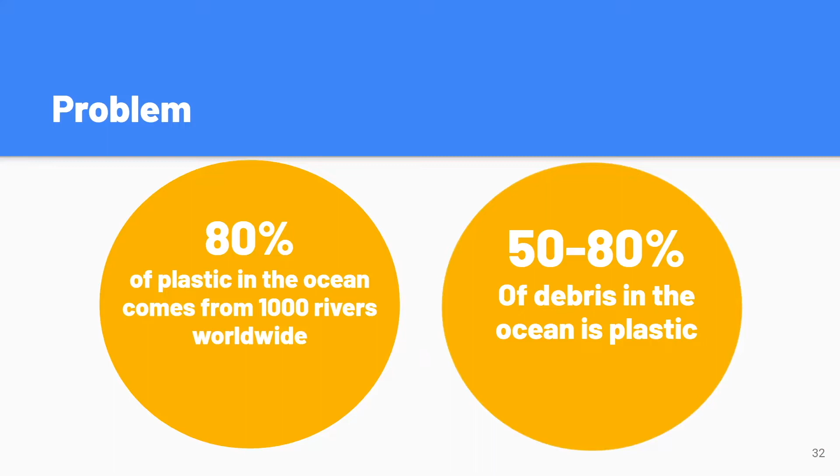On a global scale, 50 to 80% of the debris entering the ocean is some kind of plastic. And 80% of this plastic debris comes from land-based sources and enters through rivers. While there are many efforts to reduce this debris, such as anti-littering campaigns, banning single-use plastics, and beach cleanups, the rate at which plastic enters our oceans is still increasing. Therefore, it is imperative that more direct solutions be implemented to remove and prevent these plastics from reaching the ocean.

This problem has adverse effects on the marine ecosystems it affects, as many species are physically harmed by both the ingestion and entanglement of these plastics. The exposure of larger plastics to the ocean environment causes them to break down into smaller microplastics, which are defined as any plastics smaller than 5 millimeters. These microplastics contain chemical contaminants and can be ingested by many marine organisms.

One study found a concentration of up to 2.1 trash items per fish in a certain area. As these plastics make their way up the food chain, the concentration of plastics increases, and by the time it enters the seafood consumed by humans, it can range from 0.7 to 30 milligrams per 100 grams.

There are current solutions aimed at collecting marine debris, both in rivers and in the ocean. These solutions, however, are often prohibitively expensive and lack the capability of sorting the trash they collect. Without this functionality, much of the debris collected by these sources is either sent straight to the landfill or incinerated. Because the mismanagement of landfills is a large contributor to why this debris enters marine systems in the first place, sending it straight back to landfill does very little to fix this problem in the long term.

Their collected debris cannot be brought into recycling facilities as there are far too many non-recyclable items to sort through. Thus, without the ability to sort items, these solutions are missing a key portion of the problem they look to solve. The goal of our project is to build off of existing models to create a cheaper and more effective solution to the problem of ocean plastics.

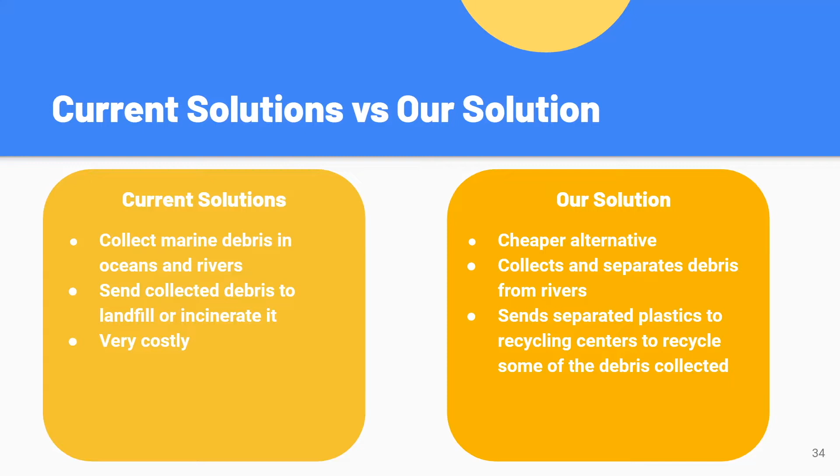By including the novelty of sorting trash into plastics and non-plastics, the debris collected by our collector should be able to be sent to recycling facilities, as the amount of non-recyclables in the plastic bin will be at a much lower concentration and will be more easily separated into recyclables and non-recyclables. Our design consists of a floating body that is stationed at 2 points in a river, with funneling arms that draw the debris into our collection area.

The trash will then be picked up by a conveyor belt, and as it moves along, our algorithms will run to detect plastics on the conveyor belt. When a plastic is detected, as it falls off the conveyor belt, a panel will open, allowing it to fall into the plastics bin. Otherwise, if plastics are not detected, the panel will remain closed and the debris will fall into the non-plastic bin. These bins will be removed by a forklift and brought off-site. The benefit of using 2 separate bodies in the river is that our design will not impede any wildlife or boats from moving down the river.

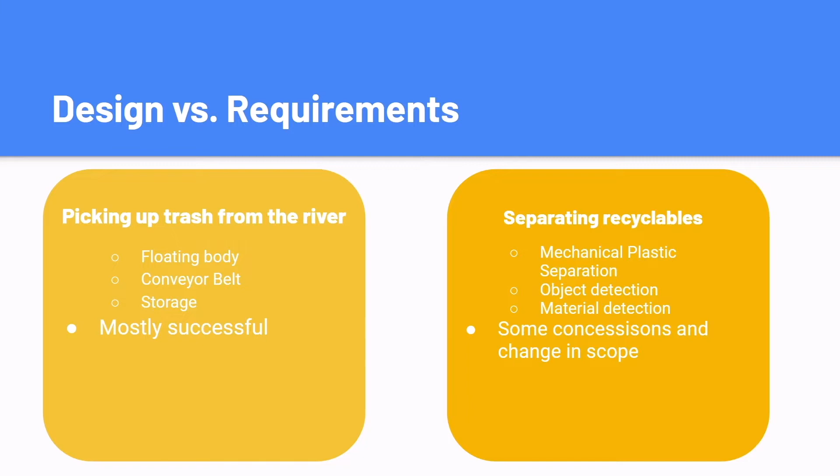Next, we'll compare our design and our initial requirements. Overall, there are essentially 2 large overarching categories of capabilities that our system is supposed to exhibit. The first is picking up trash from the river, and the second is separating recyclables from that trash. For the first category of picking up trash, our system satisfies basically all of the capabilities.

One capability needed for all the other ones is having a floating base to hold everything, as well as a frame to protect the other subsystems. The resulting design for the base and frame are capable of this, as backed by various buoyancy calculations and flow simulations. Another needed capability was funneling the trash. For this, we sourced a design that was used by similar river cleaners, and as such, we're confident it will work for ours.

We also required something to move trash out of the river and into the bins. For that, we found a conveyor belt system to buy and adapted it for our system. Lastly, we needed storage capable of storing trash and being easily removed while also remaining stable on the rocking boat. The resulting storage bins and latching system satisfy both of those.

While the design largely meets all the targets based on the previous examples, we were unable to simulate or actually test the full system at picking up trash. Before proceeding with any actual manufacturing, running a full-scale simulation or even a scale model testing would be imperative to find any possible faults that we missed.

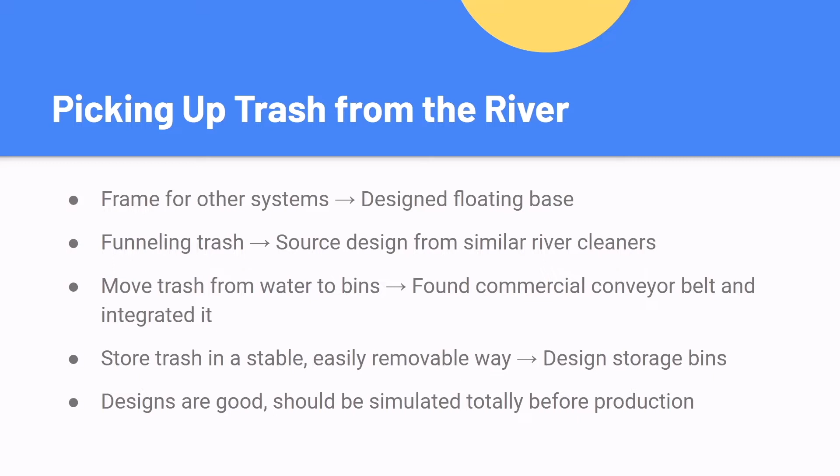The second primary category is separating recyclable plastics from non-plastics. From the start, there were concessions that had to be made here in order to reduce the scope to be feasible. For one, we considered if we needed to implement a drying or jostling station to further separate the trash for processing. However, this would add too much complexity for what was already a very large project. As such, we assumed a sparse trash flow, which wouldn't need this extra station.

Whether or not this drying and jostling step is actually needed is still unknown. Further testing with real trash in a river and analysis of trash density in rivers would be needed to answer this question.

The other mechanical portion of the separation, the panel system, met the capability it was designed for, and this was physically portioning trash into either of two bins. The system had no large difficulties in design, so we're confident it can perform the task, and we will be testing on a prototype to actually confirm it can.

For the algorithmic and sensing side of the plastic separation, there were a couple concessions that had to be made due to the fairly difficult process. Initially, we had a goal of using a SWIR camera to be able to detect if an object was plastic or non-plastic. However, due to the expensive cost of the needed camera, we pivoted to testing with a handheld spectrometer, for which we would aim to write an algorithm.

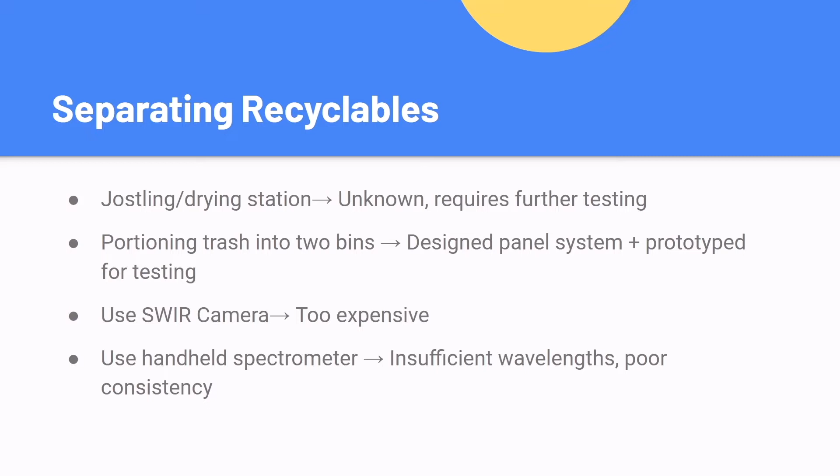Unfortunately, the spectrometer was insufficient for our goal as it was unable to detect the necessary wavelengths, and it was also extremely inconsistent based on the shape of the object. These are issues that we wouldn't have had for the real camera. However, we were still able to use the spectrometer to detect some plastics and other materials in very flat scenarios.

Due to the inadequacies of the available equipment, we decided that the overall detection of plastics was not going to be feasible during our remaining time. As such, the scope was pivoted to instead use a color detection algorithm, which would mimic what the plastic detection algorithm looks like. While we believe this algorithm is similar enough such that it would translate to the SWIR camera, this would still need to be tested on such a camera to confirm it.

Another part of the algorithm, which would be needed for the actual design, is a computer vision system for object detection. The goal would be to form an object mask and track its position. We have developed an algorithm for webcam, which would pretty easily be translated to our design camera. While it is able to track similar objects on the conveyor belt background, it is still insufficient in detecting objects layered on top of each other.

Overall, on the mechanical end, all the designs that we made ended up satisfying their intended capabilities. On the algorithms, again, there were definitely a lot of issues and unknowns which had to be explored early on, and so we didn't have much time at the end to do actual designing. The scope had to be reduced, but the resulting algorithms are similar enough that implementing them on the real design would not be a big leap in logic.

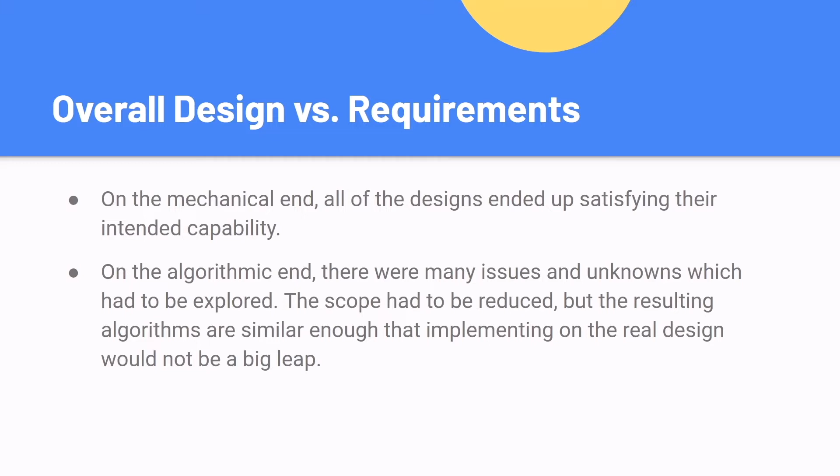Hello everyone, I am Oscar Knox White, and this quarter I worked primarily on the floating body subteam. We began this quarter researching the existing designs and seeing where we thought we could improve. Additionally, we looked into what materials were commonly used when designing aquatic bodies.

Our initial design consisted of a platform that used large plastic barrels to provide the buoyancy to the rest of the body, with a frame to hold the other subsystems and provide support and cover to the body. For this design, we planned on using aluminum 6061 for the frame and platform, and high-density polyethylene for the barrels. These materials are commonly used for long-term aquatic equipment as they have high durability to the environment.

As we did not end up going with the barrels, we did not use HDPE in our final design, but aluminum 6061 is still the primary material for the frame. After making these selections, I began developing the frame of the body. I started with an initial CAD just to get a general idea for the shape.

The design was angled on the sides with a truss along the edges to provide lots of support to the body. In this initial design, the dimensions of the body were far too large to reasonably continue, so I realized I would need to redesign it. It was also decided that the only loads being carried by this outer frame would be from the plastic separation camera, the conveyor belt, and the plastic separation mechanism. Thus, the strength of the frame could be lower than I initially anticipated.

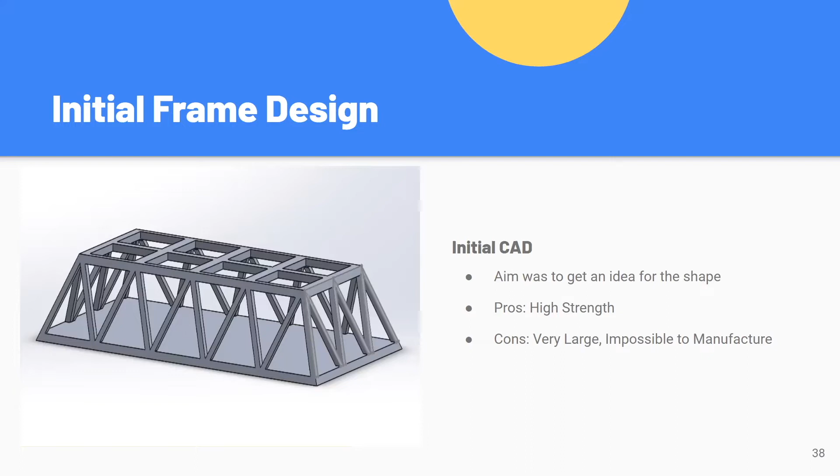I also needed to determine a way that this could feasibly be manufactured, so I decided to use shorter individual beams that would be welded together on site. This next design shown is very close to the final design that we are using now. The only adjustments made to it can be seen in the full assembly, which I will show later on. I then moved on to work on the funneling design and got a bit of progress on that before we decided one of my teammates would be better suited to finish this design.

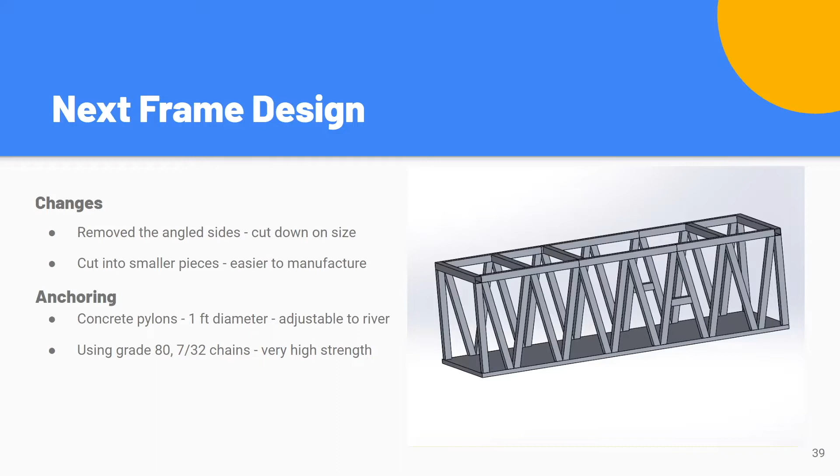From there, I began researching the anchoring of aquatic bodies and decided I would use concrete pylons with chains securing the body to them. These pylons are very similar to boat docks and can be easily installed in rivers using PVC piping. I then determined that the anchoring would be the largest load on the body, so I ran a simulation to verify that the body would be able to withstand it, which is shown here. This study is run with a load that is over 6 times what we expect the average drag force will be in the river, showing that the frame will certainly be able to handle the force of the anchoring.

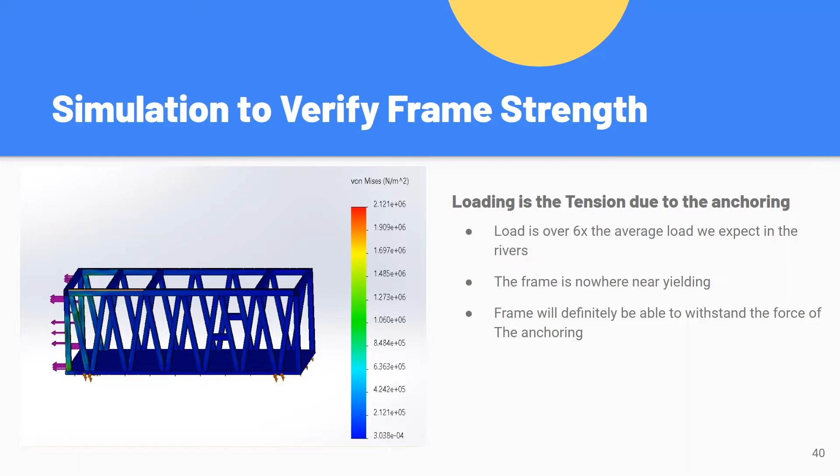Another thing I worked on that didn't end up being used was a small scale version of the floating body that we were going to use to demonstrate the movement of the body in flowing water and to verify that our funneling worked. This was ultimately scrapped because the flow of the water likely cannot be directly scaled down in the way that we expected. Also, the anchoring system we are using is kinematically constrained, and thus the floating body will not move.

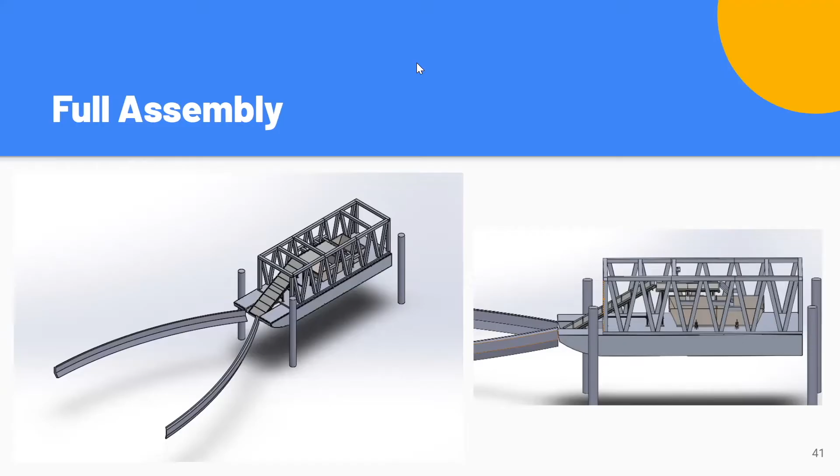Hello, this is the base of the floating body. Its purpose is to carry the entire assembly on top of it and therefore provide buoyancy so that the system is not in the water. But this part of the floating body is meant to be in contact with the water and not allow too much drag to occur on it while also being big enough to house everything on it properly.

The interior consists of a welded frame. It's made out of aluminum 6061 3-inch by 3-inch hollow square tubes. The exterior of it is covered in a 1/4-inch aluminum 6061 sheet metal, which is going to be welded over the interior welded frame. The material for these two sections was chosen due to aluminum 6061's manufacturability. It's easy to weld, and it is also pretty lightweight, cheap, and strong enough to carry everything. It is also very good and anti-corrosive against salt water.

The floating body base weighs about 1,100 kilograms, and its volume provides about 54,000 newtons of buoyancy. So with this, it is able to support the full assembly on top of it about 1.5 times, since the full assembly's downward force is about 36,000. So this is more than enough to carry that weight.

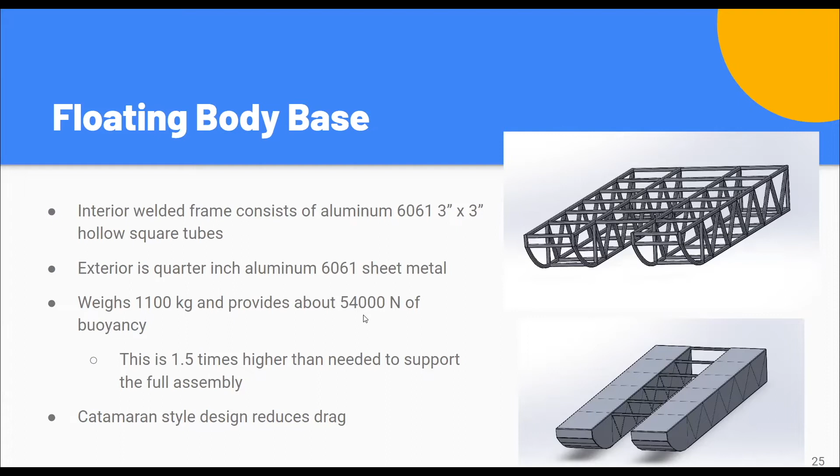The funneling mechanism is meant to allow trash to be slowly funneled towards the center of the floating body, and therefore for trash to load onto the conveyor belt. To achieve this, we're going with Elastec's Permafence. It is a product meant to contain trash and other debris on rivers.

A similar product has been used by other river cleaners such as Mr. Trash Wheel. This one in particular is designed to be low maintenance and very durable. So therefore, one only needs to install it once and it can be there as a permanent solution. Very little maintenance.

As for mounting solutions, it does require something different than used by Mr. Trash Wheel, for example. Mr. Trash Wheel uses a similar product, but they mount it on both sides of the river. However, since ours is only going to be mounted on one side of the river, whereas one side of it is going to be free in the river, we need something to be able to anchor it. And that's precisely why we're going with Elastec's Terra Twist anchoring system.

What this does is you install an anchor into the ground on one side of the river, and a rope is able to hold the free end of the Permafence. And this will be done so that that rope doesn't have any contact with the trash and is floating above the river and doesn't interfere with any passing debris.

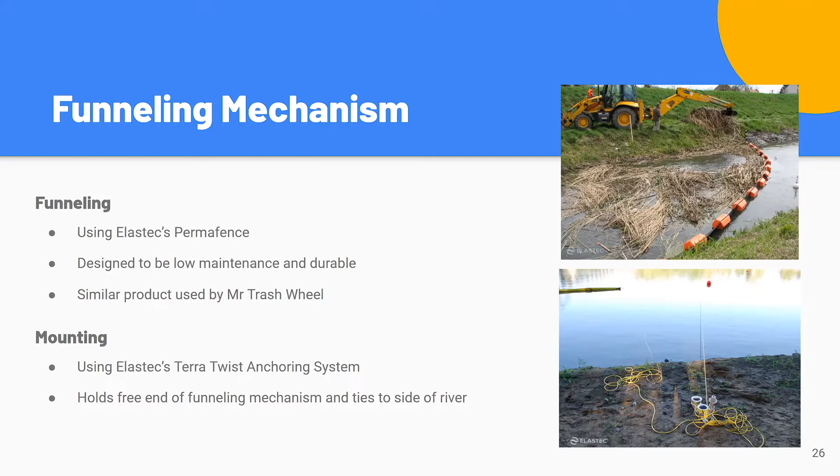For how we are going to pick up trash from the river, we looked at how other similar market products accomplish this. Looking at both Mr. Trash Wheel on the left and the Interceptor on the right, both utilize a cleated conveyor system to move trash from the water and onto their system. So since they were successful in this, we looked to adopt a similar system for our design.

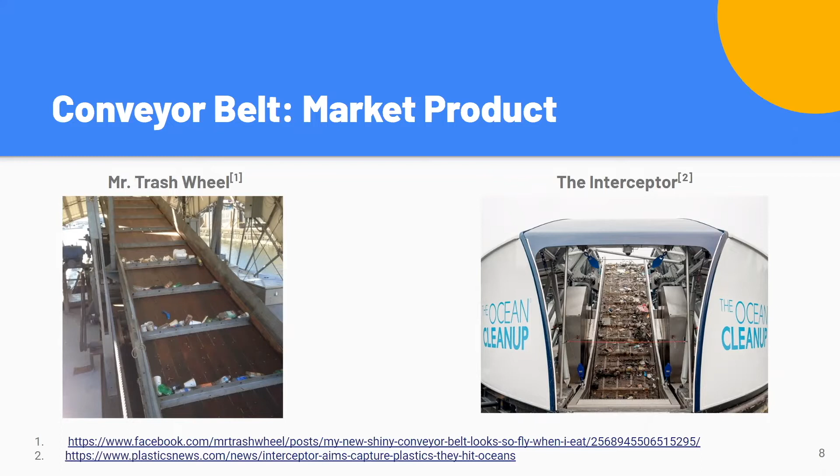For our design, we are using two conveyors. One is inclined and the other is flat. To narrow down our scope, we decided to buy the conveyors off the shelf. The incline conveyor is the GUF-P 2000 cleated conveyor from mk North America, which mimics the same purpose as the other competitor's design. And the flat conveyor is from Wire Belt, which includes a wire mesh belt that allows for excess water to drip out and is an ideal material for wet environments.

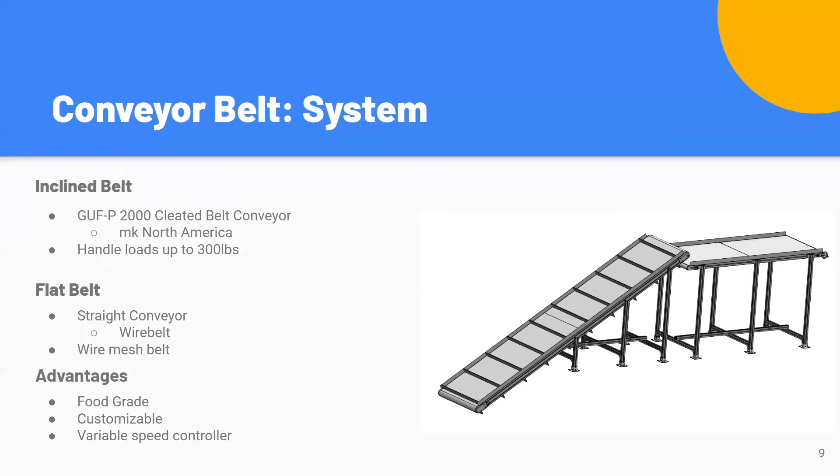The reason why we decided on these two is because they're both food grade for wet environments. They're also fully customizable in size, and they both include a variable speed controller. We conducted a motion analysis using SOLIDWORKS to analyze what angle is needed for the incline conveyor and to see the size range of items the conveyor belt can pick up.

Because there are some trade-offs between using a steeper angle and a shallower angle, we ultimately decided on an angle of 30 degrees because it would save us on cost and would not heavily affect the system capability. A higher angle would reduce the ability to pick up trash, but it would shorten the conveyor to save cost. A shallower angle would increase the ability to pick up trash, but would lengthen the conveyor, which drives up the cost.

For the simulation, because SOLIDWORKS took an extremely long time to calculate the movement of multiple objects, such as in this study, we had to simplify some aspects of the simulation. For the water, because SOLIDWORKS did not have any fluid dynamic options, we mimicked the water using a conveyor that moves the object to our conveyor system. We also had to simplify the cleated conveyor to only one paddle because the simulation included many moving objects, which was taxing on SOLIDWORKS and would crash on multiple occasions.

But from the analysis, we ultimately found that the conveyor can successfully pick up objects with heights of up to 0.1 meters because of the paddle. Because the water was modeled as a flat conveyor, we could not test rounder objects as they would get stuck in the pseudo water.

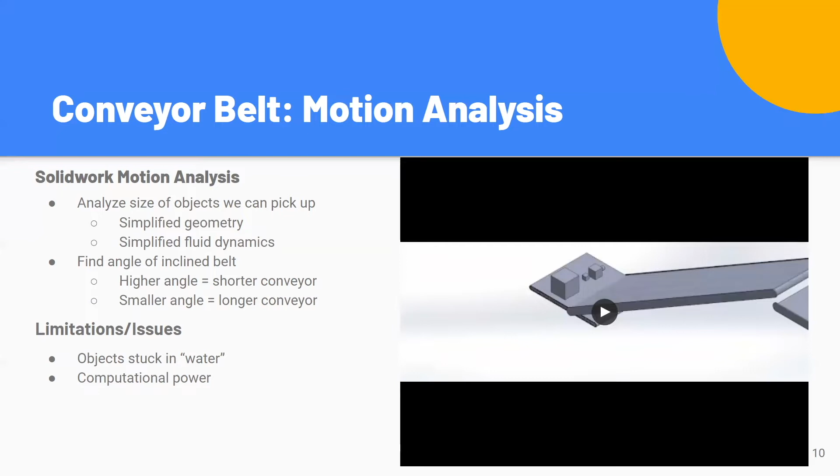As to how we are connecting the conveyor system to the floating body, we're using a square mounting bracket. The bracket is wrapped around the legs of the conveyor system and is bolted to the floating body. The bracket is made out of 316 stainless steel, which is a commonly used material in marine applications because of its high strength and high corrosion resistance.

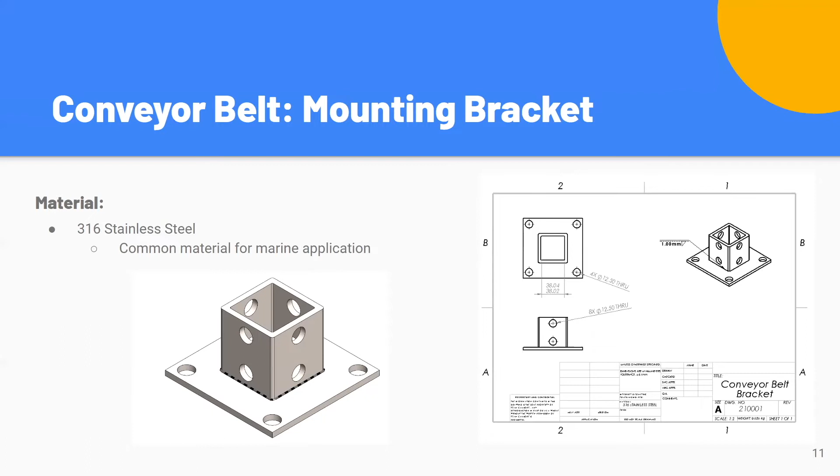The bracket will be constructed with a square tube that is welded to a sheet metal and also includes 12.5 millimeter through holes for screws and bolts to go through. To test the brackets, we conducted FEA analysis. Since our design is deployed on rivers and is supposed to remain stationary, the FEA analysis done was a static study. Since the design of the floating body experiences about 300 newtons of drag force, we applied that same force to the X and Y direction of the skeletal frame of the conveyor.

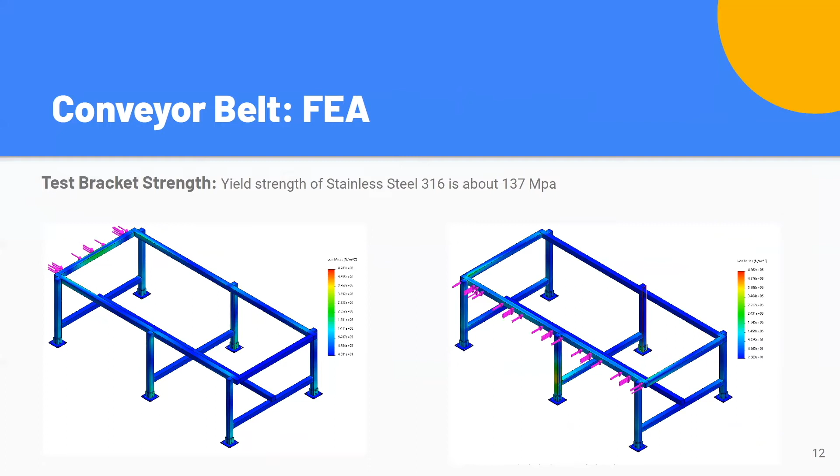The yield strength of stainless steel is around 137 megapascals. So from the FEA analysis, the bracket has a high factor of safety value, so we can ensure that the brackets are sufficient to contain the conveyor.

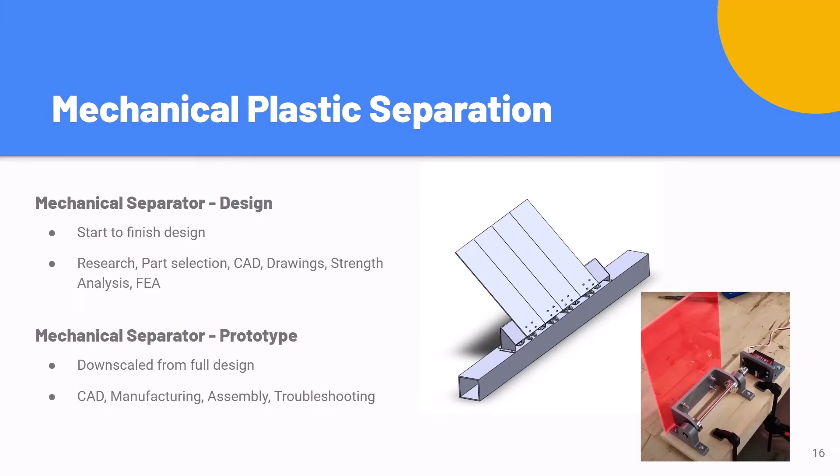Hi, my name is Tommy, and I was responsible for the mechanical plastic separation mechanism. There are two main parts to this. The first is the design that's going on the full boat. This was a start to finish design, so it included research, part selection, CAD drawings, strength analysis, and FEA. The second part is the prototype. This was downscaled from the full design and was made to be easily manufactured given our circumstances with limited materials. Again, this included CAD, manufacturing, assembly, and troubleshooting. With that, let's jump directly into the CAD models.

So here is the CAD model for the design. As you can see, we have 4 panels here and they all move independently. They can move in either two positions, either this closed position here or 45 degrees into this open position. In this open position, any recyclables coming from the conveyor belt will fall into this gap and land into a bin for the recyclables. In the closed position, any other trash that is not recyclable will simply slide onto the panels and then off of them into the trash bin.

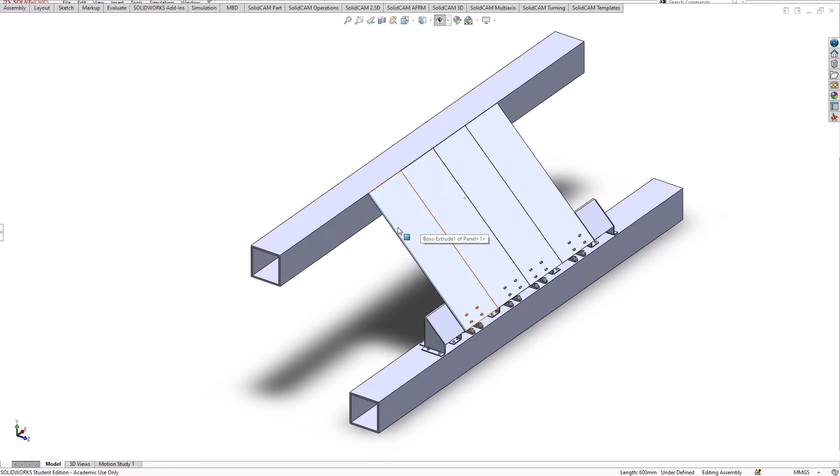The reason we have 4 independent panels is that it allows us to separate any trash that is side by side. Say we had a piece of trash on the right that isn't recyclable, but a piece on the left that is recyclable. We could open this panel on the left while leaving the other panel closed, allowing us to put both of them into the correct bins. With that, let's jump into some more details on the mechanism.

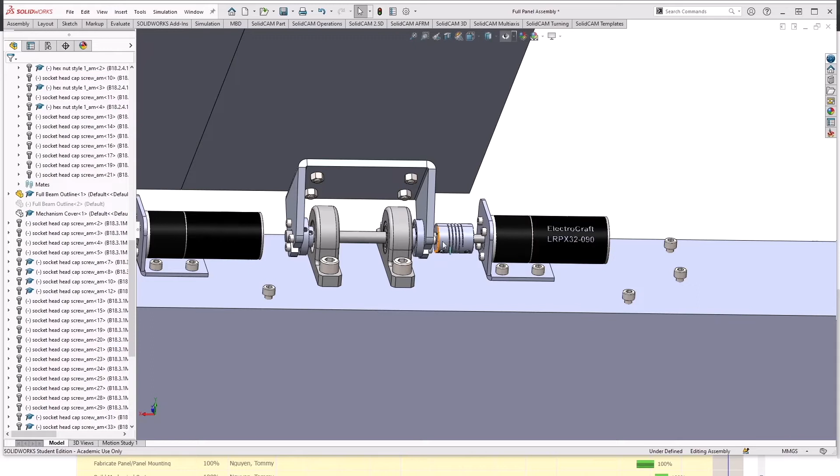Going right to left, we have a brushless DC motor, which was selected to provide the necessary torque and speed to rotate our panel. We have a sheet metal bracket just to hold the motor to the base. We also have a coupler here connecting the motor to the shaft. This shaft sits between 2 bearings, and these bearings are also embedded into a bearing block, which allows it to be mounted to the base.

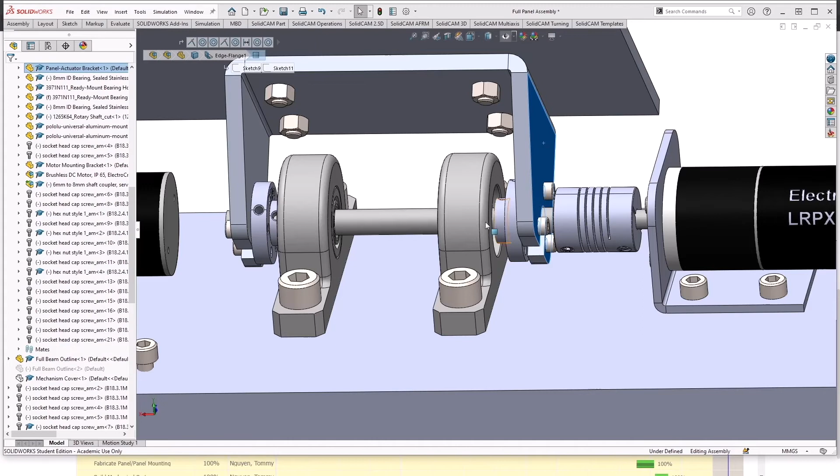Connected to the shaft, we have these 2 universal mounting hubs, and these just provide an interface so that we can mount our bracket onto the shaft. Lastly, we have our panel connecting to this bracket, and so everything's basically one solid unit, which will rotate with the shaft. There were 2 big considerations during the design effort.

The first is to keep things as low cost as possible. Part of this meant that we opted to use as many commercial parts as possible rather than designing them in-house. The only parts that are designed in-house and have to be manufactured are this bracket and this panel. And these are pretty simple sheet metal parts, so they'll be a lot cheaper to produce than something like machined parts. The rest of these parts are commercial parts, and that provides us a lot of cost savings. We've also opted for mostly bolted connections rather than welded. This means cheaper assembly, but also easier and cheaper maintenance down the line.

The second big consideration was waterproofing. Our system does have to run in a marine grade environment, and we do expect some level of saltwater spray on this entire system. Therefore, for the parts that we selected, materials was an important choice. We decided to use stainless steel 316 for many of these parts, and aluminum for many others. Stainless steel 316 is marine grade, so it doesn't rust the same way that normal stainless steel does, and aluminum also does not rust, so we expect it to last very long in the marine grade environment. The motor here is also IP65, water resistant, and saltwater resistant.

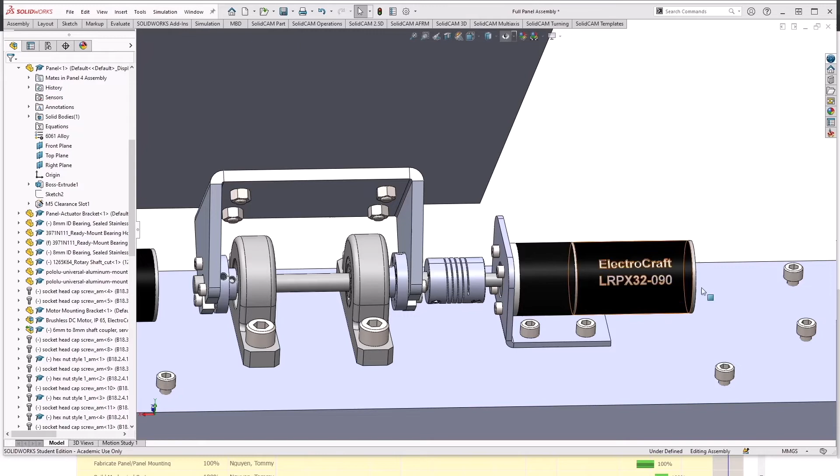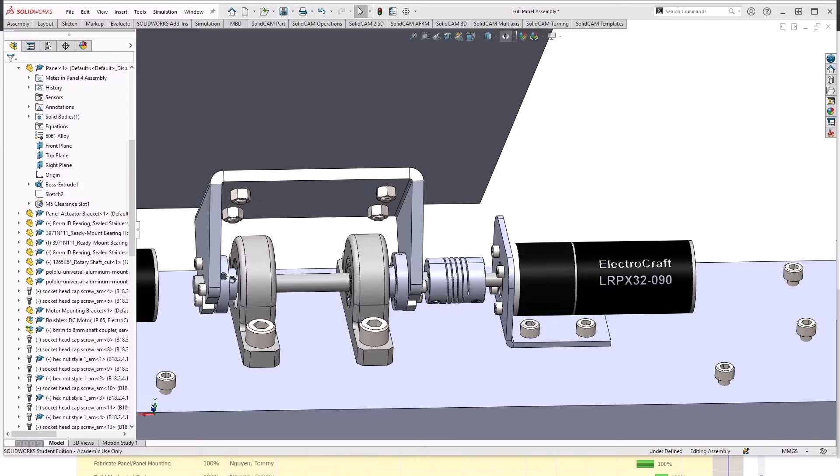We did spend a lot of effort in choosing the correct motor. We went through a lot of different options, including trying to make a DC brush motor waterproof. In the end, we just ended up selecting this brushless one because it provided the waterproof capabilities that other motors simply weren't able to.

If we zoom out here, we'll see that the 4 panels are actually slightly different in the way that they're arranged. The arrangement here is necessary due to some of the space constraints that we have. Nonetheless, actually all these parts are all the same, including the brackets and the panels, and so this saves quite a bit on manufacturing costs because we're not doing one-offs for every single panel.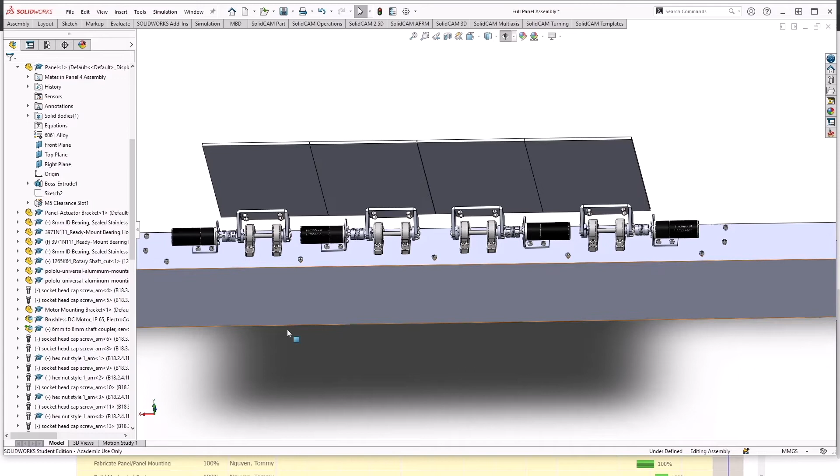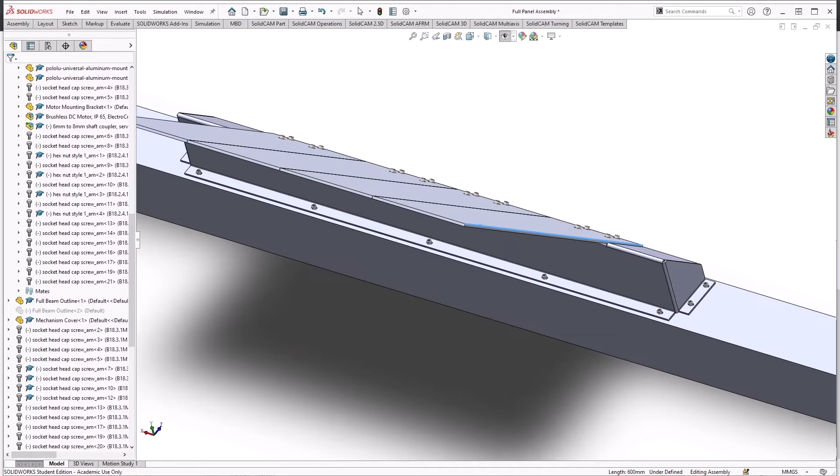Lastly, we have this mechanism cover here. Initially, this was designed to help with the waterproofing efforts, but our design didn't end up needing it. And so the primary purpose now is to protect against any debris that might hit the motor or hit the shaft and cause damage.

Jumping over to the CAD for the prototype, we have a pretty similar design here. The main difference is that all these parts are now going to be out of 3D printed plastic instead of the aluminum and stainless steel that we were working with before. We still have a couple commercial parts, but now many of these are basically 3D printed or cut out of acrylic.

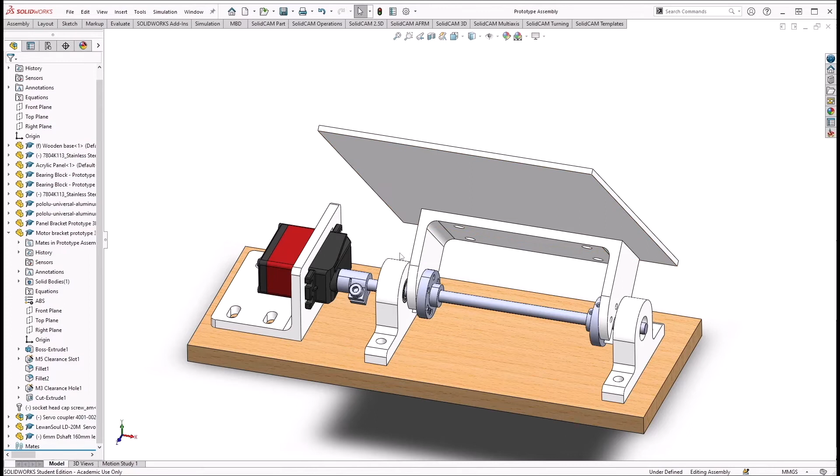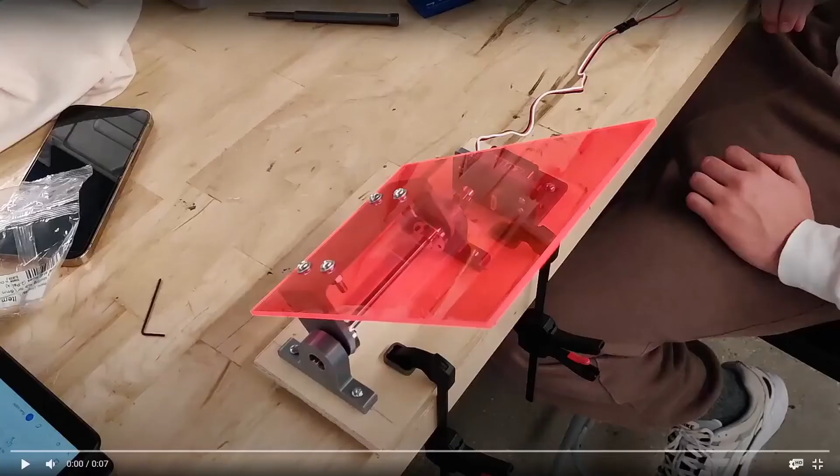We've also swapped the motor here. This is just a normal kind of cheap servo motor that isn't waterproof. We don't care about waterproofing for the proto, and the servo motor's a lot cheaper and a lot easier to control. So here's a video of the prototype.

So while we haven't done any substantial testing yet, we have validated that the system does move fast enough to represent our design, and so any testing that we do on it should be very representative of what we expect on the actual design.

Hi, my name is Juan Diego, and I'm responsible for the electrical end of our project, with a main focus on the plastic separation subsystem, which could basically be broken down into two main parts, a prototype and a design. On the prototype end, I was responsible for selecting components, designing and prototyping our circuits, and hardware debugging. I was also in charge of writing basic scripts so that we could run our servo motors for testing purposes.

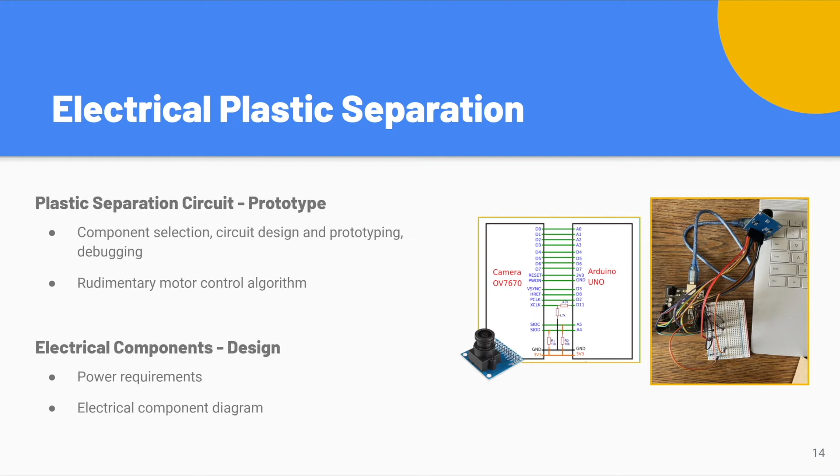On the final design end, in terms of the component selection, aside from the microcontroller unit we would use, which I chose, the component selection was done by my other teammates based on calculations they made regarding our full design. And after knowing all the necessary components, I was able to get the power requirements for the entire system and created a simplified diagram of the main electrical components of our full design. So let's dive into the prototype first.

For plastic separation, the components of importance were the material detection camera and the motor to drive our panel, depending on what the camera detects. To simplify prototyping, after some research, I decided to go for a servo motor, since it provides the necessary torque without the need for a motor driver and has easy connection to microcontrollers. And at first, I went for a camera module that has good compatibility with the microcontroller we were using, which was an Arduino Uno.

First, I built a fairly easy servo motor prototype using an SG90 servo, and then I helped Trevor, another teammate, build the camera module circuit, which was a bit more time consuming but simple to make with the circuit diagram we had. Then, integrating the two together was fairly simple on the circuit end. However, the issue with it was that it provided some challenges for the software side, since it would be hard to upload our algorithm directly into the Arduino, as it used Python for the image detection, and Arduino doesn't normally support Python.

Therefore, for our second prototype, after talking to my software counterparts, we decided to use a webcam directly from a laptop to give input to the Arduino, as this would allow for Python to run. This worked in my favor too, since it greatly simplified the camera circuit to a simple USB connection from the laptop to the Arduino.

The challenge then was creating the circuit for the final servo we used for prototyping, which was an LD20MG servo with enough torque to drive our prototype panel. Since this was a bulkier servo, it required an external power supply, but after some research and help from one of our TAs, I was able to create a minimalistic but effective circuit to move our panel, which you can see a video of to the right.

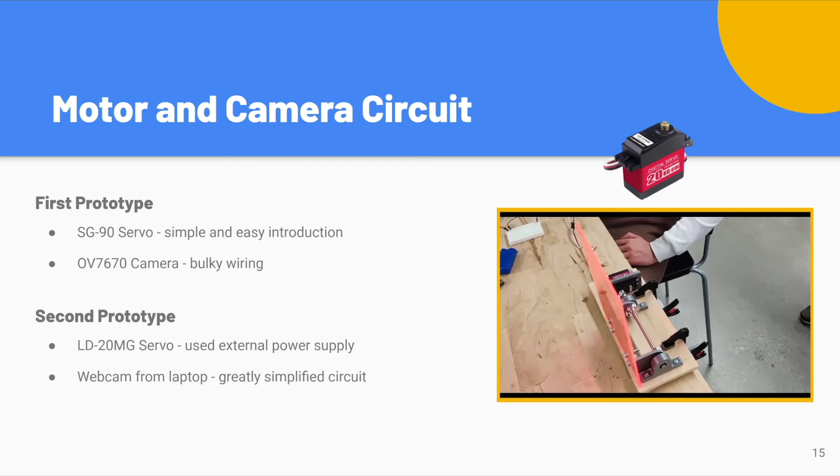This mainly shows our panel working, but at the end of the video you can see in the upper left corner that the breadboarding is very simple, and that blue blob that you see is our 7.4 power supply.

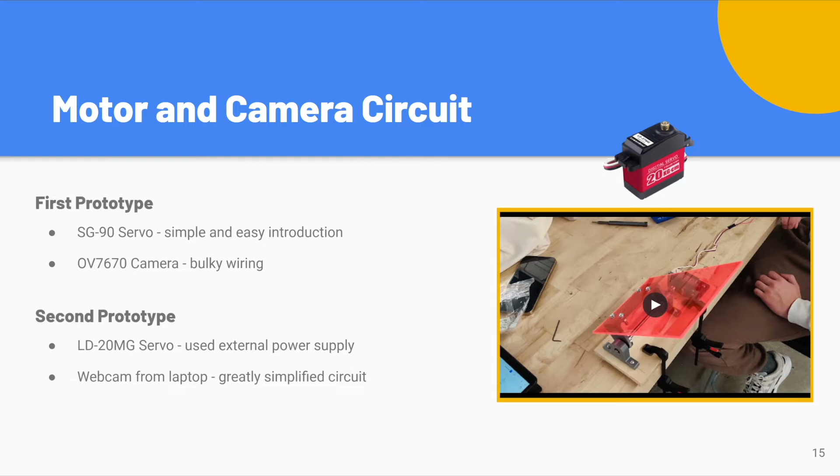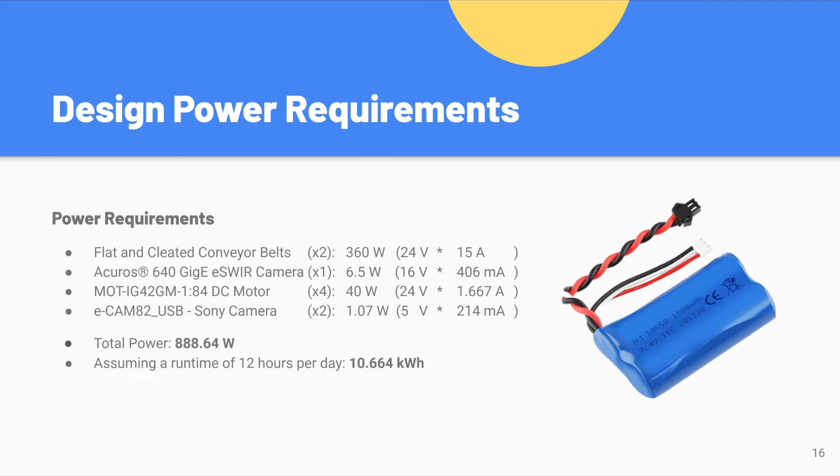Finally, we had an electric component diagram which I designed. Assuming we would run from a power line, which you can see from that brown box, which represents a 24-volt power supply, we would use it to run our 24-volt belt and the 4 brushless DC motors. Then we would have 2 converters, one from 24 volts to 16 volts, so that we can run the Acuros plastic detection camera, and one from 24 volts to 5 volts, so that we can run our 5-volt ARM microcontroller unit and the trash bin cameras.

Additionally, you can see from the arrows, mainly the red ones, the plastic separation input and output, where the input is from the plastic camera going into the microcontroller, which would then control the motors. And you can also see from the blue arrows how the stoppage for the conveyor belt would work, depending on if the trash bin cameras see if the bins are full or not.

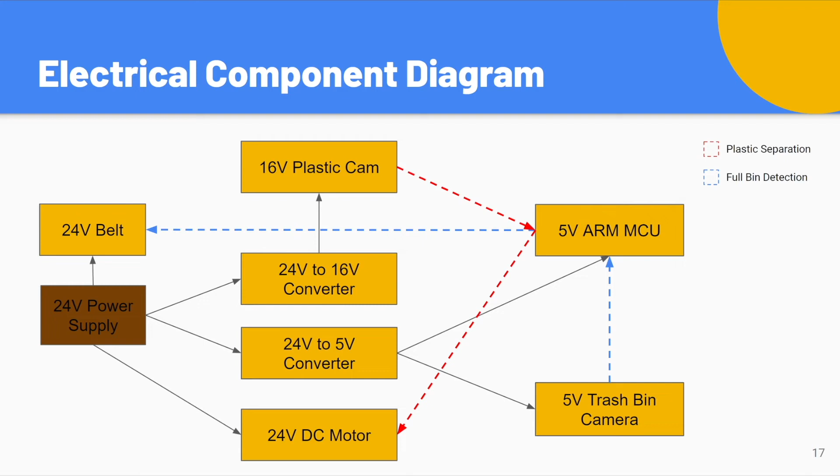All right, this is Sash, and right now we'll be going over the system design, how the components are wired together, and the specifics of the material classification algorithm. In the final product, everything will be controlled by a single microcontroller. Input will be received through a hyperspectral camera in the form of a 3D video feed. The 3 dimensions, of course, are 2 dimensions for pixel position, and the 3rd dimension will be spectral reflectance information, aka the reflectance of each wavelength for each pixel.

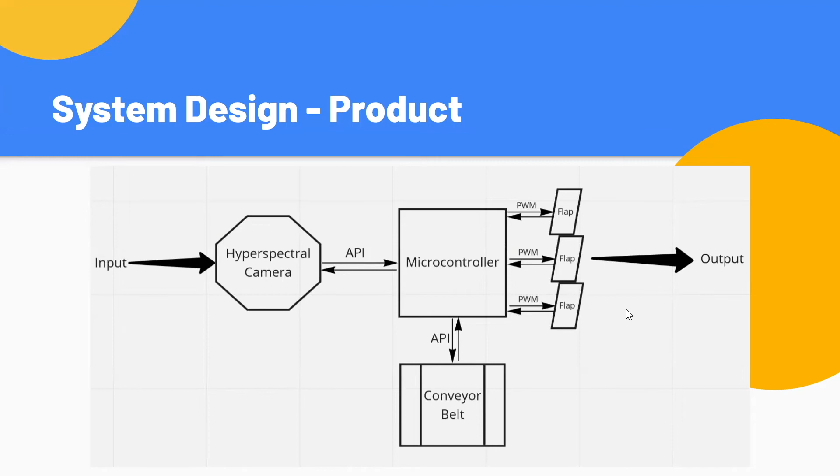And the hyperspectral camera will be controlled using an API to just record at all times, and the microcontroller will use the images to detect objects within the images and classify what material each object is, whether it is plastic or not. The microcontroller will also be telling the conveyor belt to move at a constant speed, and it'll control the flaps to move to the appropriate positions based on what objects are coming in, what positions they are, and what materials they are. And the output of the system will be the objects being dropped into the different bins.

So this is the control flow for how the system operates. Assuming we are looking at the conveyor belt top down and the conveyor belt is moving to the right, then the objects will approach from the left side and end up in bins on the right edge. So first thing that'll happen, an object is detected on the left side of the image. First, not the whole object will be detected, only the right part of it. So the system will wait until the object is fully inside the boundaries of the image, and then it'll use the pixel reflectance information to classify the object.

Now, the conveyor belt is moving at a constant speed. So once the object is classified as plastic or not, the system knows how long it needs to wait before sending the signal to the flap to move to the appropriate position, because each object will take a set amount of time to move to the edge of the conveyor belt since it's moving at a constant speed. And once the object is appropriately in the right bin, the system will wait for the next object to come up the conveyor belt and repeat the process again.

One case is, what if the objects are too close together for the flap to flip fast enough for it to drop the 2 objects into the right bins? Well, since the conveyor belt is moving at a constant speed, the system knows the length where the objects are too close together to be appropriately sorted. So in this case, it'll figure out whether it's more plastic or more non-plastics, and then just send all the objects that are too close together to the same bin.

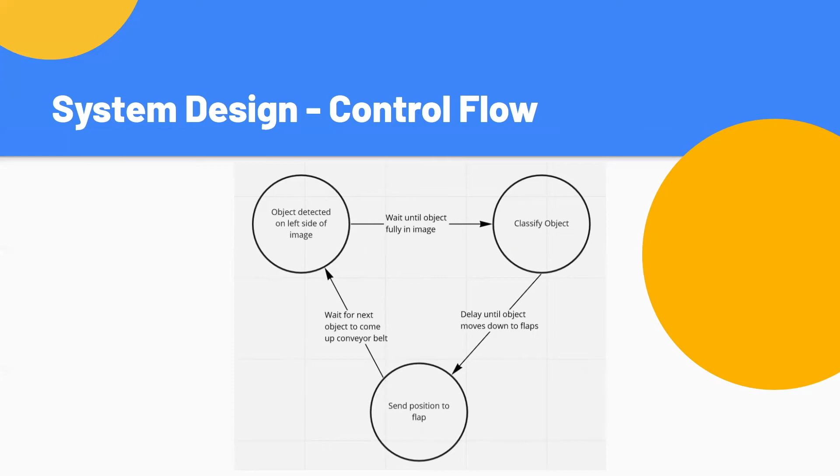So we attempt to mimic this control flow and this design in the demo. Input will be received through a webcam instead of a hyperspectral camera, since those are prohibitively expensive. And instead of a specific webcam API, we can just control it using CV, like OpenCV on Python. And the image processing is done on a laptop, and the flap control is done on an Arduino instead of

using one microcontroller. So in this sort of setup, the Arduino is the dumb one, and it literally just controls the flap. The laptop does all the image classification, does all the thinking, and it just sends a signal to the Arduino when it needs the flap to move. So it still mimics the conveyor belt, because we're not actually building the conveyor belt, we're just mimicking it by manually moving objects along with our hand.

But the laptop will still know that there's a constant speed. And then after it classifies what material the object is or whether it's red or not, it will delay an appropriate time before sending the signal to the Arduino for the flap to move. The laptop to Arduino communication happens using serial, and Arduino has libraries to control servos, which is how we control the flap to move in the right position.

And the output will still be what bin the object is dropped in. And for this demo, we won't be classifying plastics or non-plastics, since we can't with this equipment. We're going to be classifying what color an object is, whether it is red or not.

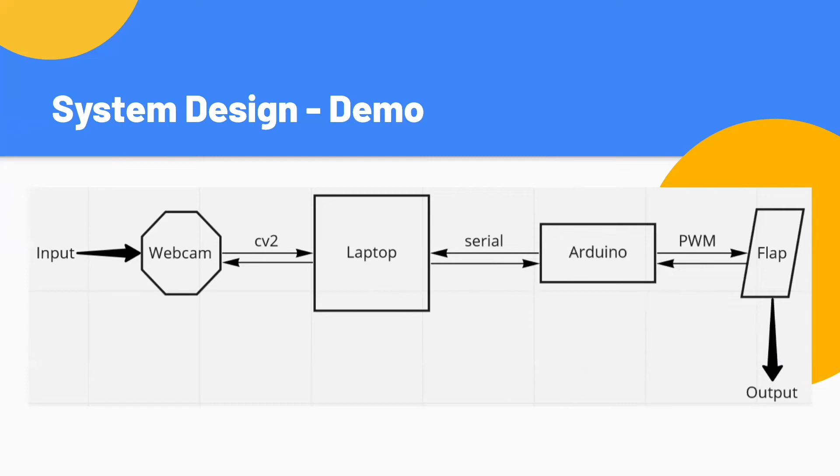Okay, now for the material classification. Essentially, how we're going to approach this in the actual product is using the hyperspectral image. We'll get all the spectral curves from each pixel, and then we'll average them out to find what the average curve for this object looks like. And we'll also store a database of the spectral curves of all the common plastics.

And then we'll extract two features. One, we'll use the peak seeking algorithm to find the wavelengths of the peaks. And two, we'll find the spectral contrast angle of the sample as compared to each plastic in the database. So with the spectral contrast angle, you treat the spectral curve as a vector where each wavelength is a different element. And then you use a kind of distance algorithm to find out what the contrast is between two spectral curves. It basically tells you how similar two materials are.

So when we're analyzing a sample and trying to classify it as plastic or not, we're going to use this peak seeking algorithm, and we're going to find the spectral contrast angle compared to each of the common plastics in the database. And we'll plug these in as features into a machine learning model.

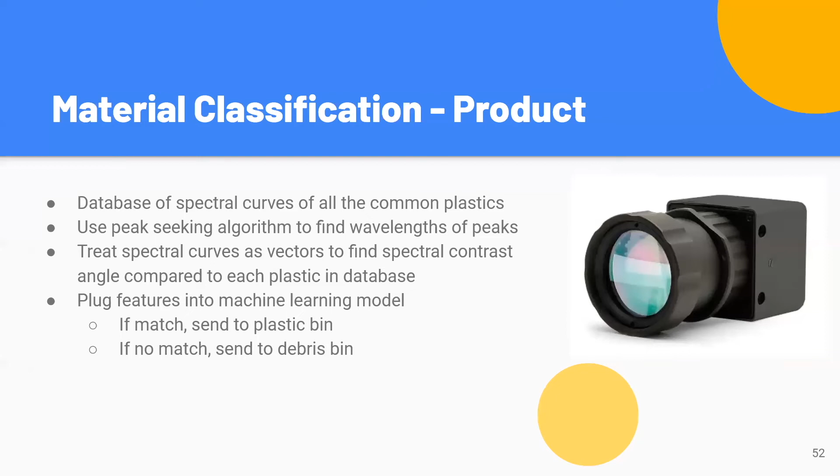So for the demo, we try to mock this as closely as we can, except with the LinkSquare. Unfortunately, the LinkSquare doesn't provide us with the wavelength range that we need to actually classify plastics. And it also doesn't have the wavelength resolution that we need, because it's susceptible to surface characteristics like curvatures and spikiness. It only really gives consistent responses for flat materials or fluid or powder type materials. And these issues aren't present in an actual hyperspectral camera.

And the other thing is the spectral response that the LinkSquare provides is very affected by the light sources within the LinkSquare. So there are always going to be three peaks, at 450, 550, and 700 nanometer wavelengths. And we have to use the heights of these different peaks to figure out what material it is. As opposed to an actual hyperspectral camera, where we'll have a flat-ish curve, and then peaks where more light is reflected.

So the way we approach it for the LinkSquare is we use the height at the 450, 550, 700 nanometer wavelengths as features. And we also find the spectral contrast angle compared to each material in the database. Right now, this is working for two materials: Sandpaper 180J, which is sandpaper made out of aluminum oxide with like 180 roughness, and salt. And we actually can achieve 100% accuracy for differentiating these two materials.

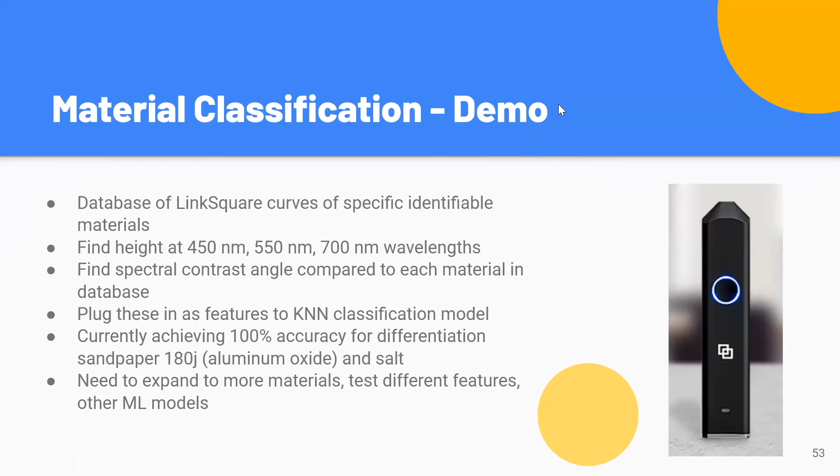Hi, I'm Jennifer, and I'm gonna talk about plastic separation. It has 2 main parts. First part, real-time object detection on a black moving conveyor belt. Second part, plastic detection, for which we will be implementing the assumption to detect whether an object is red for the demo. We will be mocking how a hyperspectral camera works internally for the algorithm.

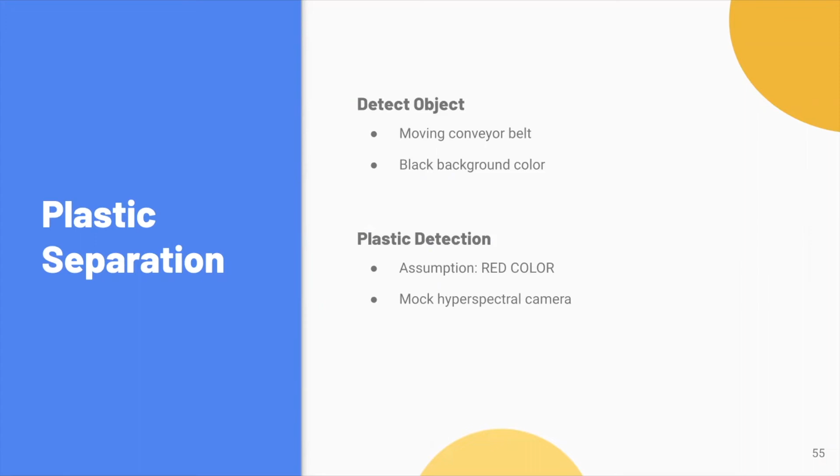And both methods require image capturing during real time, then making the analysis, which doesn't serve our purpose, which is detecting the object on a moving conveyor belt. So then we adopted the method of background subtractor in OpenCV. The background subtraction uses a machine learning algorithm to find out which part of the image changes from frame to frame, identifying the moving sections as the foreground and the static sections as the background. And this works for our purpose since the conveyor belt is all the same color, so the pixel values will only change minimally.

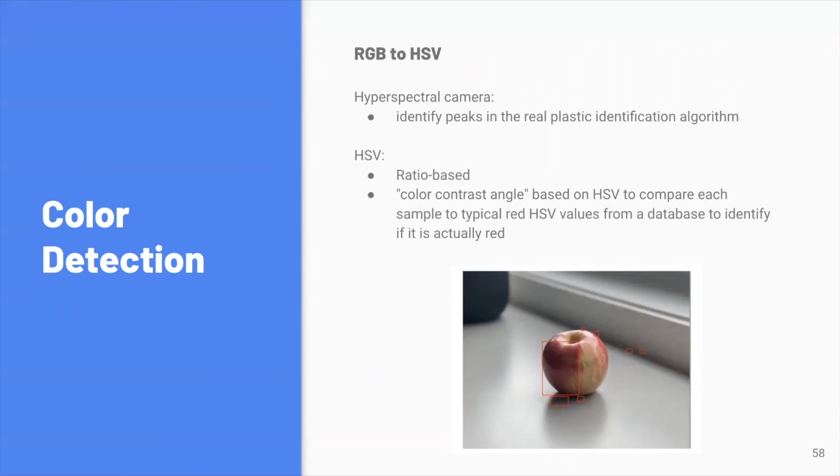Hi, I'm CJ and I am responsible for the storage subsystem. Initially, we wanted to buy a pre-made storage bin from a manufacturer to reduce the cost, but it was too tall, so it does not fit into our system. That's why we decided to design our own storage.

The storage has a dimension of 1.5 times 1.5 times 0.67 meters. It has a 1 cubic meter volume capacity. The material choice is 316 stainless steel sheet. The reason we chose stainless steel is because it is very corrosion resistant and it works very well in a wet condition. The thickness of the steel sheet is 14 gauge, which is about 2 millimeters thick.

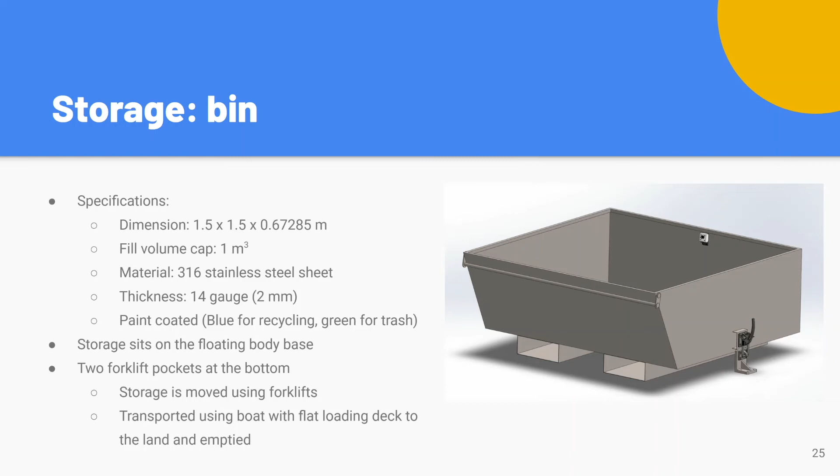The storage will be paint coated in blue for recycling and green for trash. The storage will sit on the floating body base and there are 2 forklift pockets at the bottom. The storage is moved using forklifts. It is transported using a boat with a flat loading deck to the land and be emptied. There are small holes at the bottom of the storage bin, which allow water to drain.

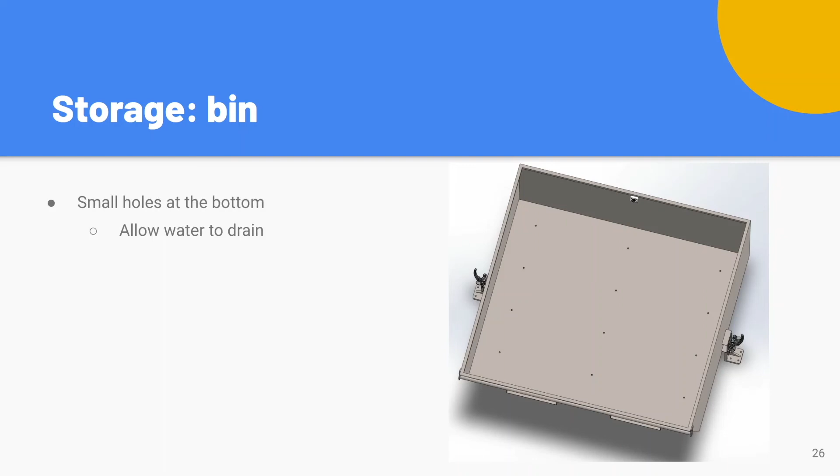There are two latch-style toggle clamps on the storage, one on each side of the storage. Its material is also stainless steel. According to the manufacturer's spec, it has a 2,000 pounds holding capacity. Its function is to increase the normal force between the storage and the floating body base, and thus increase the friction. It helps restrict movement of the storage on the floating body.

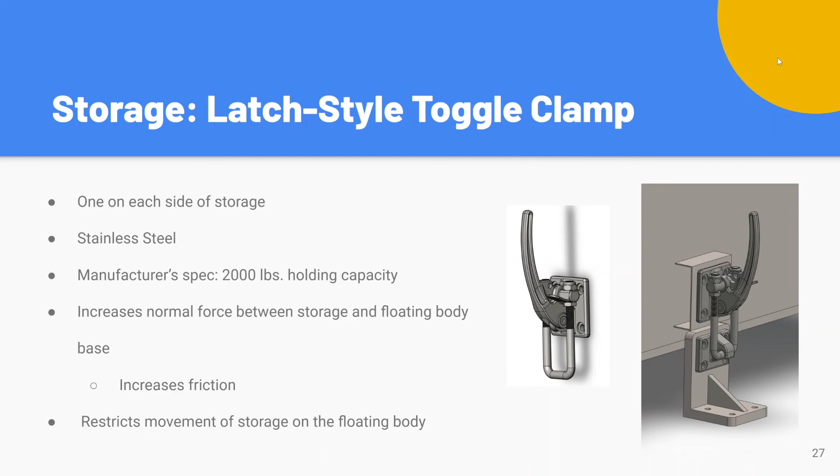Next, there is a fill level detection camera on each storage. We have designed a camera housing whose material is plastic. It is connected to the storage by an adjustable friction hinge. The view angle can be easily adjusted, and it is easier to replace the camera if needed. In terms of camera, we are using an e-CAM82, a Sony STARVIS IMX415 4K Ultra HD USB camera.

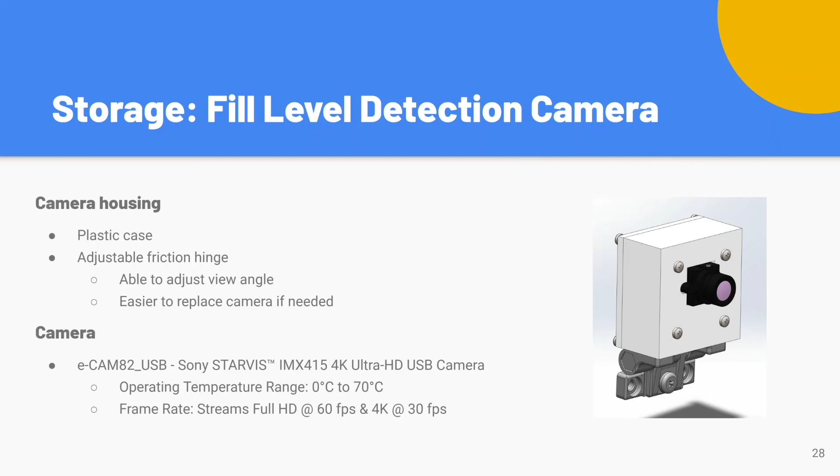This can be saved directly through a simple serial readout program and output a bitmap of pixels, which could be sent into the blob detection algorithm. This unfortunately was a little slow and needed to be phased out, which other group members will be speaking about. I also did some work with the real plastic separation camera that we would be using. This camera was out of our price range for actual testing, but nevertheless needed to be on our full design.

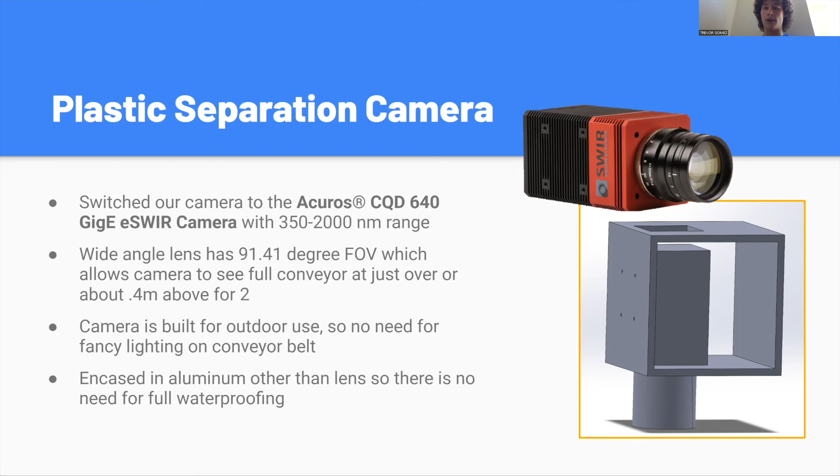This goes directly through one of the aluminum crossbars already built into the floating body and can be screwed in from the side. The wires can go in from the top, and the lens hangs out of the bottom. This camera is built for outdoor use, so there's no need for fancy lighting or anything for it to function. And the only thing that's sticking out of the aluminum is the lens, which is waterproof, so no need for waterproofing there.

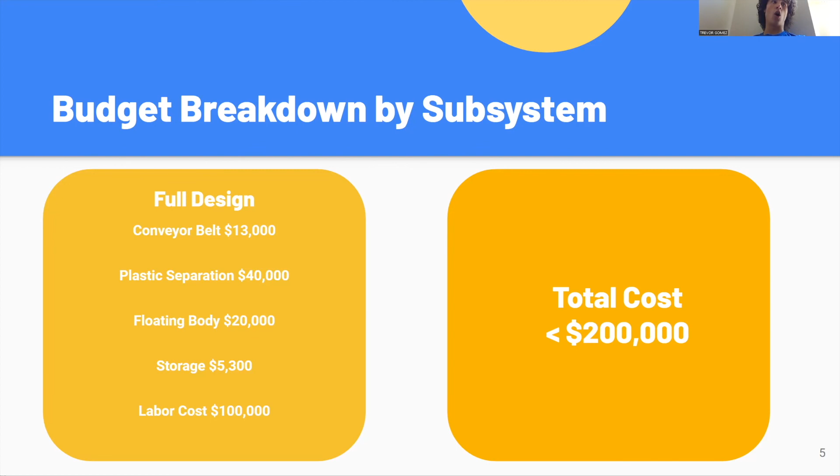I also took on a role of managing the budget for the whole system. Looking at it by subsystem, we have the conveyor belt sitting at about 13,000, plastic separation at 40,000, floating body at 20,000 before labor, and storage at 5,300. We estimate the labor cost to be around $100,000, split up mostly between the floating body, which has a lot of welding, and the plastic separation, which requires some assembly. Still, the total cost of the entire system sits under $200,000, which is amazing compared to our competitors whose costs were all over $800,000.

Finally, I've been in charge of figuring out the prototype testing. So we will be having two tests. The first will be the computer vision metric testing. We'll be looking at accuracy first and foremost in percent missed, percent false positives. The goal here is less than 10%, as our competitors claim 90% accuracy for plastic sorting. So we want to get under that.

We also want to know the distance between objects necessary in millimeters for detection. And our goal is to be under 5 millimeters to match that of the mechanical system. Speaking of the mechanical system, we'll be testing that same minimum distance for successful separation. Again, our goal is 5 millimeters based on our conveyor belt speed of 0.2 meters per second.

And our demo or live test is shown here on the right. We will be pulling a black bed sheet to simulate our conveyor belt with our webcam mounted above it at about 35 centimeters based on its field of view. The plastic separation panel will be at the end of this table that we're using and pushing things into the two storage bins at hopefully our required speed.

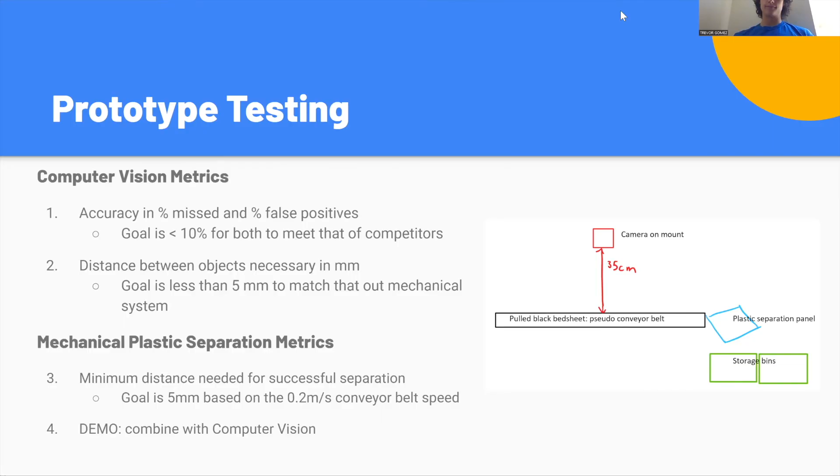I'll now be speaking about the conclusion of our project. So first question is, did we solve our problem? So we successfully created a floating river collector, which actively separates plastic on the river from collected trash so that it doesn't need to be sent to a plastic sorting center. In many cases, trash collected wouldn't be sorted at all. It would all go to landfill, creating a bigger problem.

We also achieved this all while keeping a much lower cost than our competitors at $200,000 to a comparable $800,000. Our collector is also hands off for operators until offloading, which means that it's able to collect the trash, sort, and identify when it's full to tell an operator that trash and plastics need to be offloaded. That being said, some things that our competitors did right, we were able to take and adapt to our own, such as the funneling mechanism, using a cleated conveyor, and things of the sort.

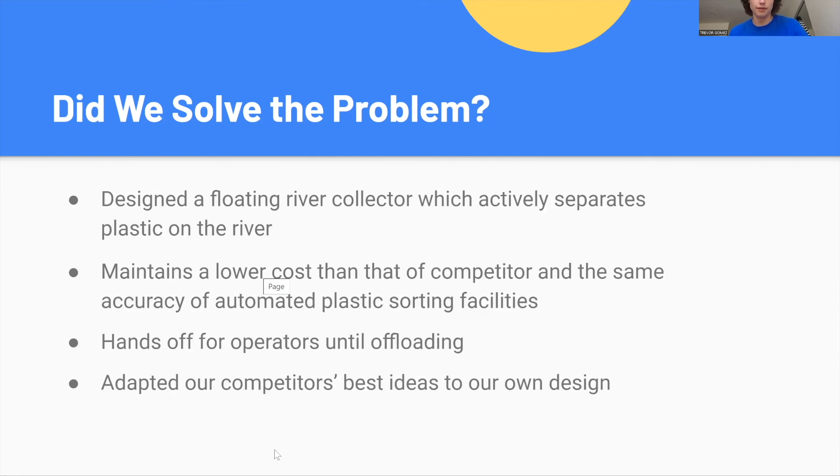Now, there are some things which we would do differently next time. First and foremost, if we had a lot more time, we would do a lot more experimentation and prototyping. For example, the blob detection algorithm could have taken a lot more fine tuning. Same with our plastic sensing. We would have loved to get a lot more data, as well as just iterations with that sensing algorithm.

We would have liked to test our funneling mechanism as well on some body of water, whether that be flowing or stagnant, just so we can make sure that trash is coming in as we intended for it, and it's not going to break off. We also would have loved to test our trash piling up issue. Basically, if our panel is only flicking to one storage or the other, there might be some piling up issues where those bins aren't filling all the way up, and we would have loved to test that.

Finally, it would have been wonderful to make a full prototype for our conveyor belt so that we could test a full body thing, perhaps even on a body of water. Some other things here. We never were able to identify a good power source other than the batteries. We originally talked about using a water wheel or perhaps a solar system to power this, but we didn't have enough time to look into this.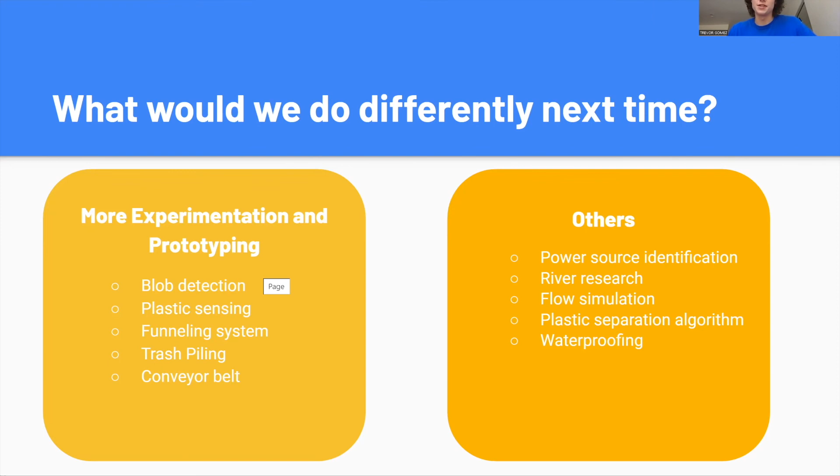Finally, we should have started with waterproofing measures in mind instead of trying to waterproof things that we had already built. But overall, I think we still had a very successful project and are proud of our final design. So thank you for listening to our final design review.